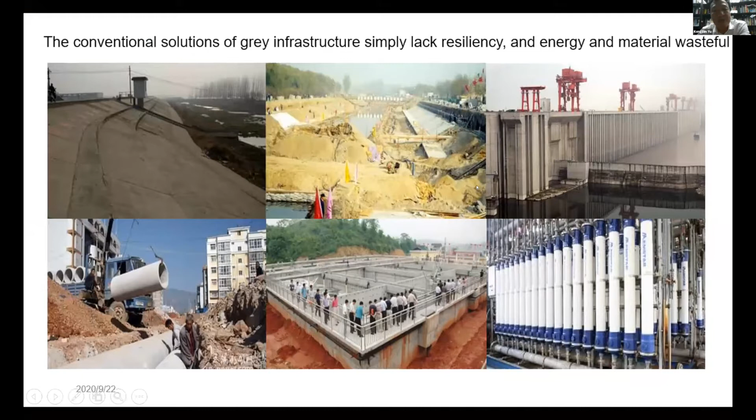Yeah. So as I said, we have to address this problem using the nature-based solution. Now, for these multiple urban issues, including water, flood, urban inundation, pollution, we usually use conventional solutions of gray infrastructure. But this gray infrastructure simply lacks resiliency, and is expensive in terms of energy, material, and certainly costs so much

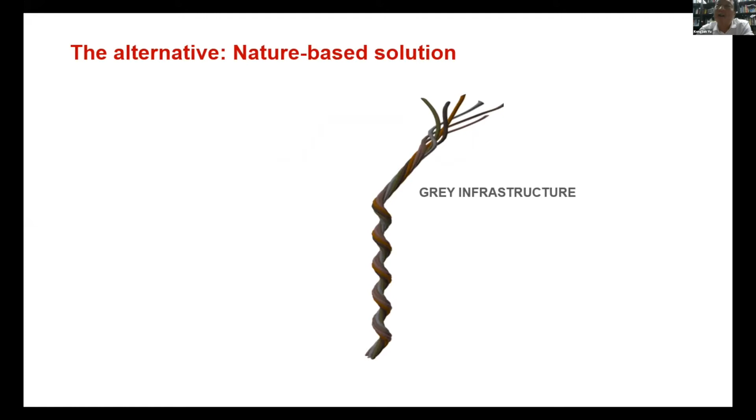concrete, you can see. When compared to the US, last century, the US is the most wasteful country in terms of use of concrete. But in China, in just 3 years, we consumed the same amount of concrete that the US consumed in 100 years. So you can imagine how much gray infrastructure we have built. And it simply messed up the whole natural system. Our rivers have been dammed in China.

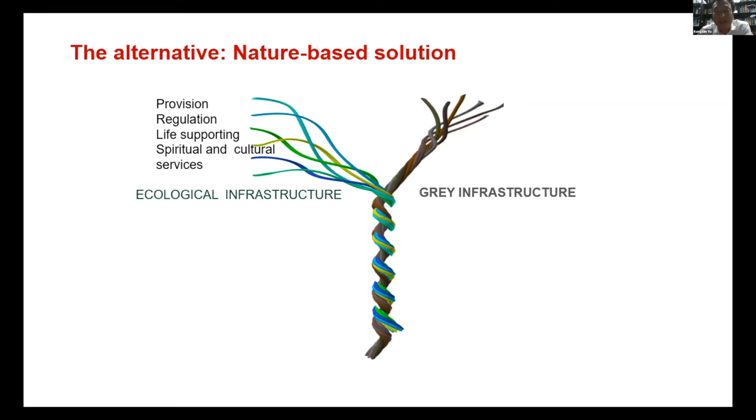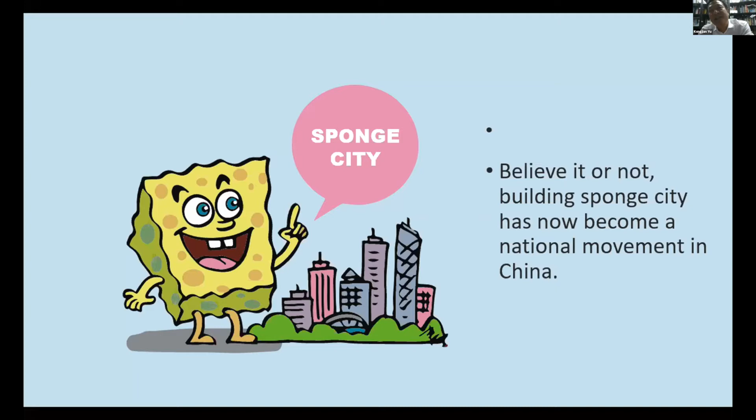So the alternative is a green infrastructure, a nature-based solution, a holistic solution that provides multiple services, the ecological services: provision, regulation, life supporting, and cultural services. So that's a holistic solution, the infrastructure. And such green infrastructure, we have a nickname now in China called the sponge city. In my definition, sponge city is simply an ecological infrastructure that retains water, cleans water, restores habitat, and is climate resilient. It's basically a nature-based solution.

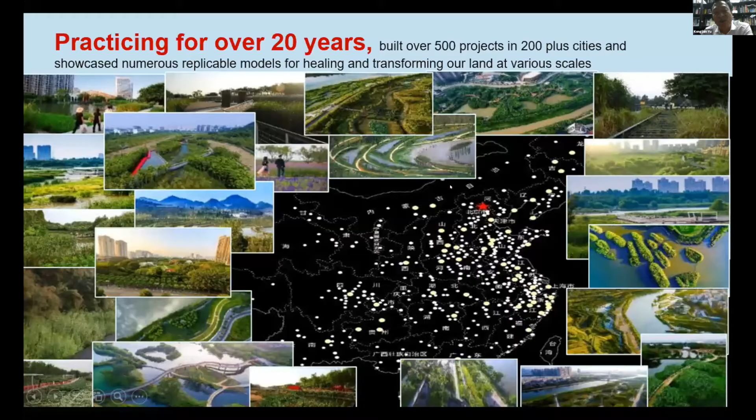So in the past 20 years, we have been practicing and testing this kind of solution based on nature, and we have built over 500 projects in more than 200 cities in China. Now today, I just want to give you 2 examples of how this green infrastructure can work. These 2 cities are in the south tip of China, Hainan Island, suffering the monsoon climate each year, flood season and dry season. So it's about how we can create climate resiliency by green solutions.

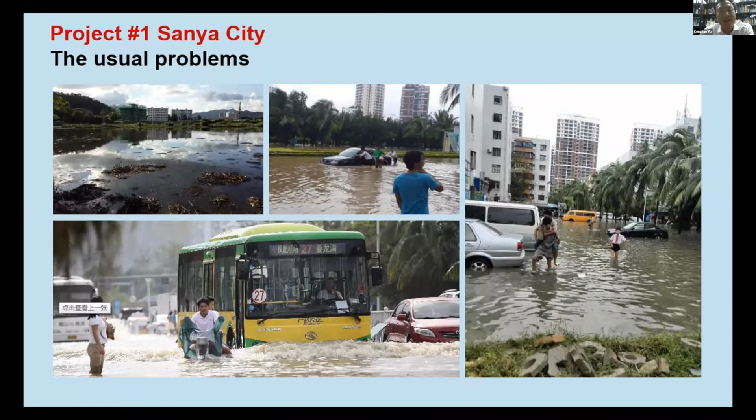So the usual problems you can see: urban inundation together with pollution, flood, and the lack of any public space accessible for use during the monsoon season. These are very usual problems. Over 400 cities in China are suffering the same problem, but particularly in the south part of China.

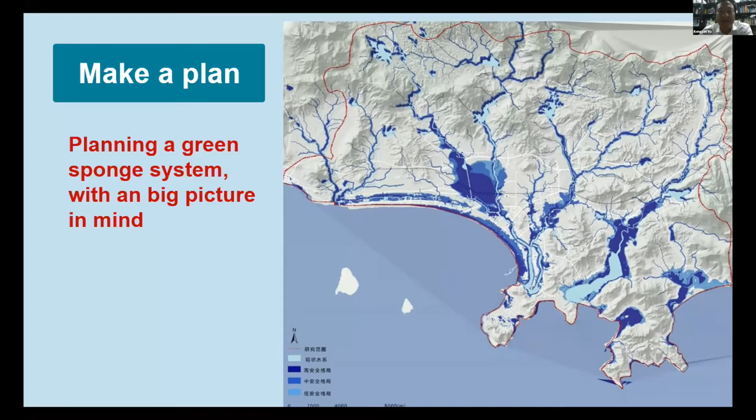So planning, as Phil just mentioned, think big, make a master plan for the whole urban region to create a green sponge system with a big picture. Use nature. Instead of the pipes and flood walls, we actually try to remove all these concrete flood walls and recover the natural system and test how this can work. And we find this critical strategic point in the middle of the city and test this sponge city solution.

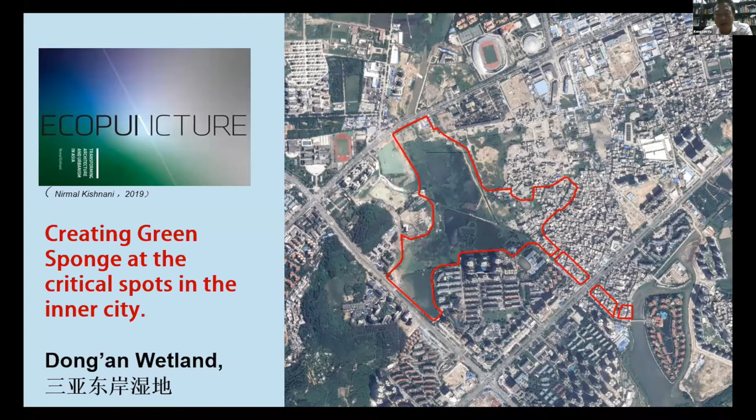This we call eco-puncture. I use my friend Nirmal's new book called Eco-Puncture. So eco-puncture, like acupuncture, we point to a critical spot in the city as in a human body. And this is a spot that connects rivers and waters, and suffers urban inundation. And the property value surrounding this site is really very low. It devalues the whole area because of the urban flood.

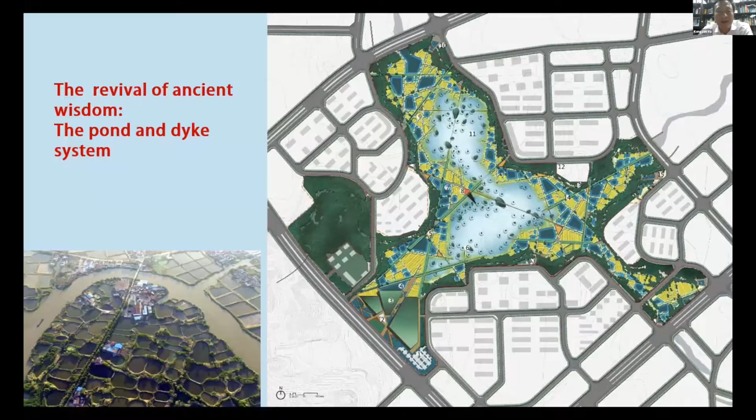And the technique is to revive the ancient wisdom. We simply use the pond and dike system in the Pearl River Delta area. In that marshy Pearl River Delta area, for hundreds and thousands of years, through testing, trial, and failure, we, the Chinese people, have learned how to work with, to live with, and to build a city within the marsh. And we borrow and are inspired by this kind of ancient wisdom, create islands, forests above the lake, and create habitat and public space by just simple cut and fill. Very simple, just one machine to create this sponge.

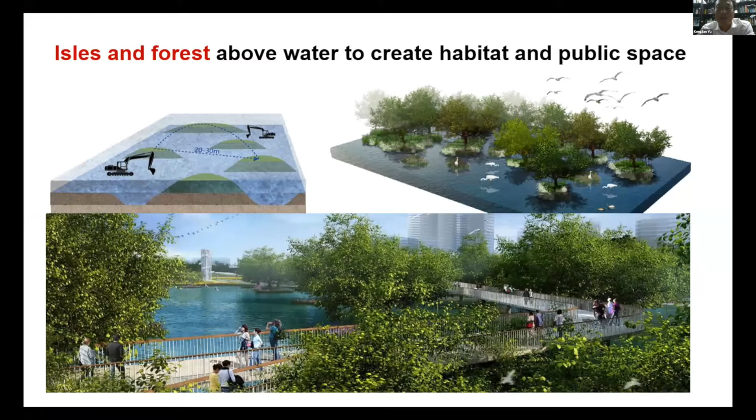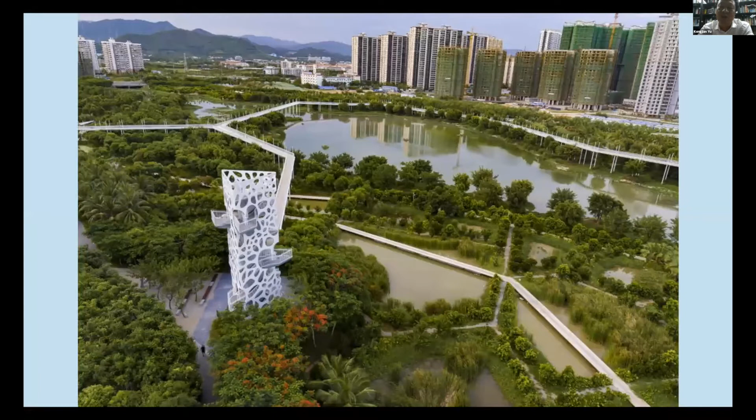And that's the rendering. It's a huge area. You can see right in the middle of the area, about 1 square kilometer in size. As the rendering shows, we use the pond dike system, islands. So these are very simple techniques. And in just 1 year, that's the process, how this has been transformed into a sponge, which has multiple functions. Now, the water is collected and filtered and habitat restored, and also integrated with public space, multiple purposes.

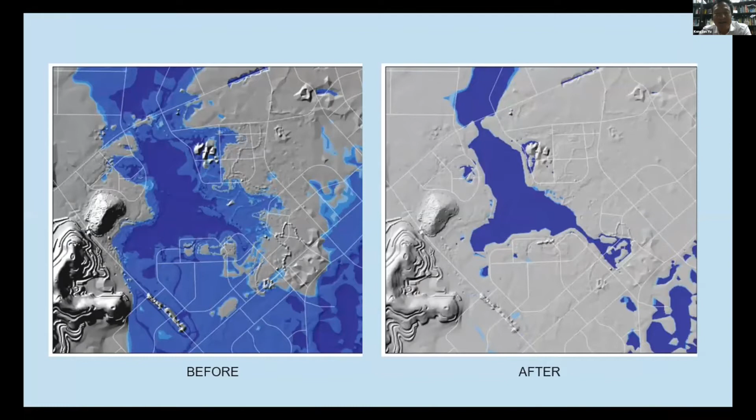And that's the result. You can see that is the before and after. The problem of urban inundation has been solved, and it certainly creates a beautiful park right in the middle of the city.

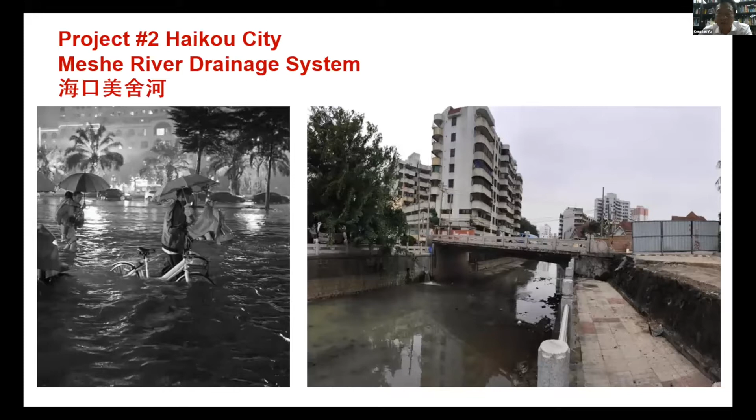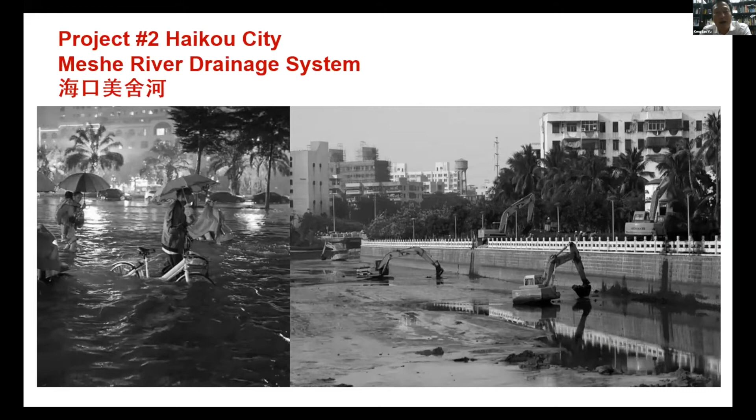Now, if you can do one project in the middle of the city, one park, we can do the whole drainage system. So this is another project, also in Hainan Island, but in Haikou city, a whole river, about 20 kilometers long. Again, you can see the problems here: flood, urban inundation, pollution, urban surface water runoff, polluted sewage leaking. And this is a conventional solution. You always try to dredge the river and line the bank with concrete, try to build the wall higher and higher. For 20 years, the problem was never solved.

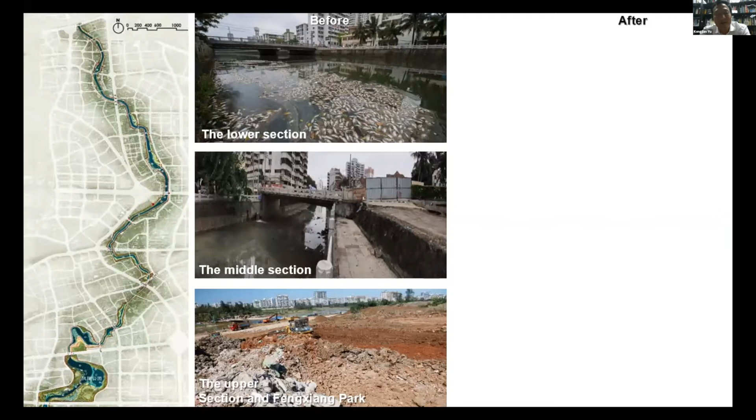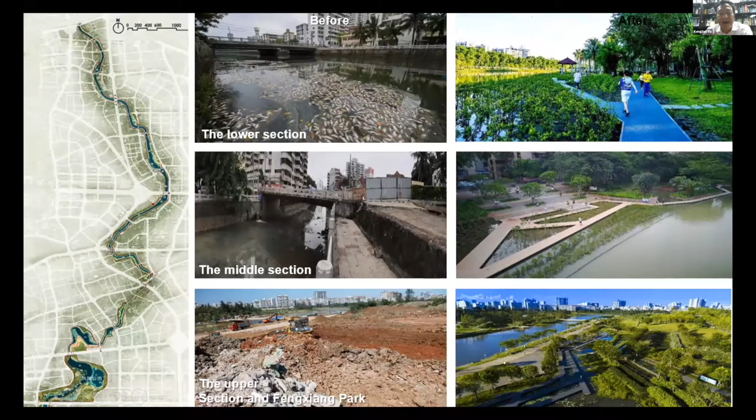So we take another way, as I said, the alternative, the green way, the nature-based solution. Create a river, recovering the river system, with three sections along the river: the lower sections, the middle sections that run through the dense city, and the upper sections. So we take different solutions, but certainly it's the same nature-based solution: terracing, islanding, and removing the concrete.

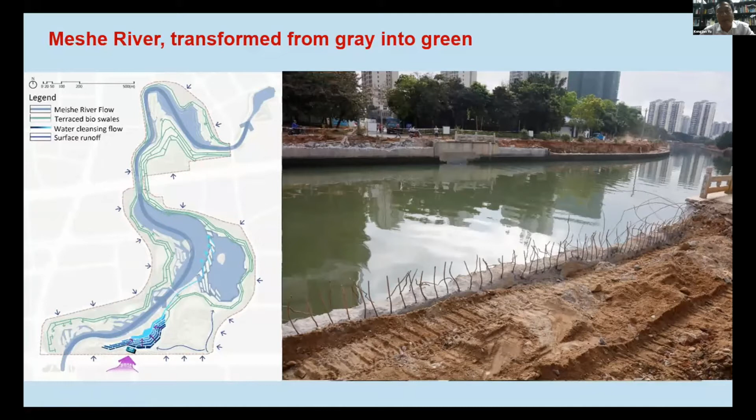That's the existing river like that. Break off, remove all the concrete. Now that sounds impossible in China, because we are still building all these flood walls in some other parts of the city. But in this project, you can see how we actually remove the concrete and divert the surface flow, the storm water, through the terraced riverbank, and use the riverbank as a filtering system. And that's the process of creating the terraces.

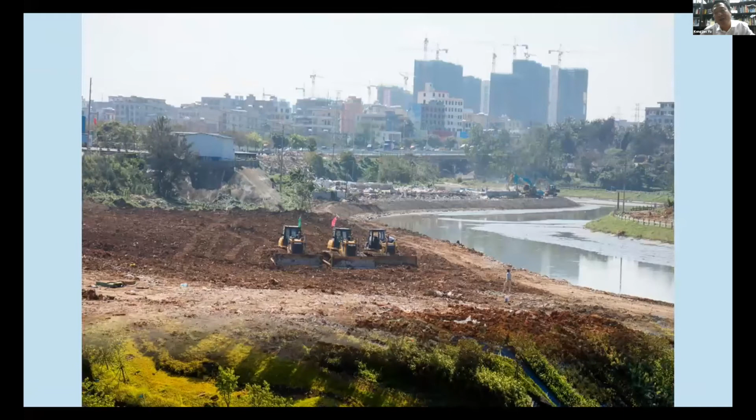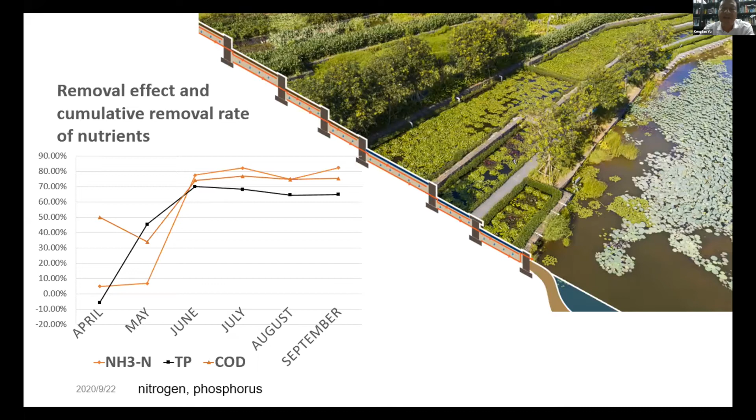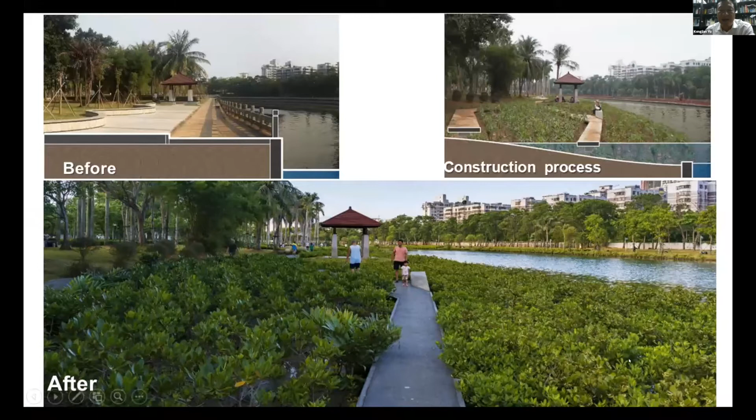And that's the process, a hard concrete construction process, and the mangrove comes back, and the recycled concrete is turned into islands, so that habitat can be created for birds, and the fish come back. That was 2015, and that's today. Fish, so much abundance, so many fish come back to the city. So these are just two examples. I'll just show you that it is such a quick, fast, efficient solution based on nature.

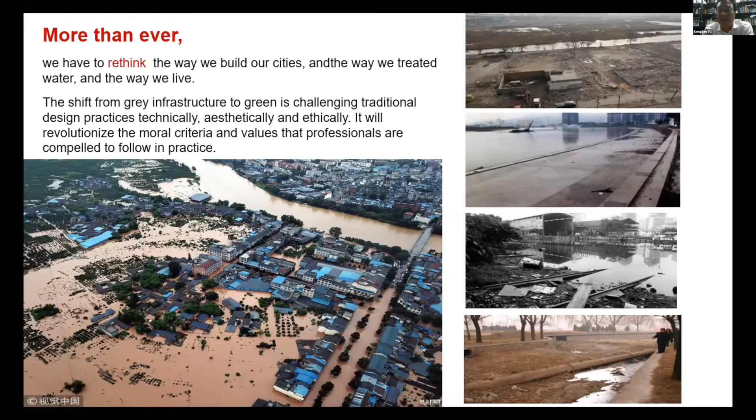So we have to think about the way we build our cities, the way we treat the water, and the way we live. The shift from gray infrastructure to green is challenging traditional design practices, technically, aesthetically, and ethically. It will revolutionize the moral criteria and values that the professionals are compelled to follow in practice. So climate change is an opportunity for us to transform our design profession. And it is across the scale, from the planet scale all the way to the backyard.

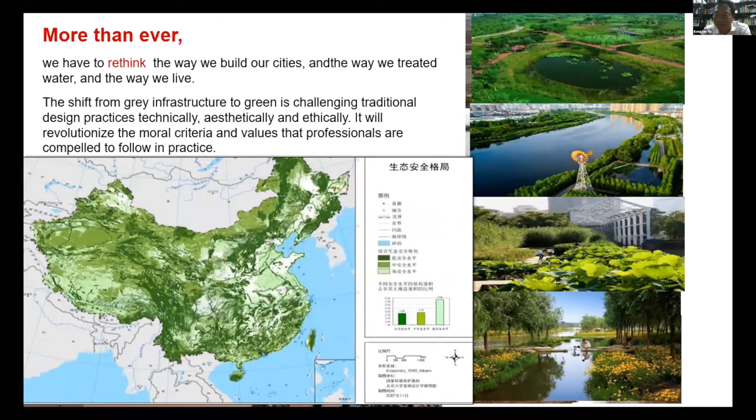Let me turn it over now to Ellen Lou. Ellen is a director of urban design and planning, the city design practice at Skidmore, Owings and Merrill, and is sitting in San Francisco. She's a world-renowned urban designer and a sought-after speaker. She gives many talks around the world, and she has consulted with over 200 mayors and government leaders in multiple cities, both in the United States and in Asia. She's a board member of SPUR, the San Francisco Planning and Urban Research Association, and the Global Institute for Transportation and Development Policy. I've worked with Ellen for over 30 years, I think, and it's a great honor to have Ellen join the panel. So Ellen, I'll turn it over to you.

Sure. Thank you, Phil. What an honor to be part of this panel. Let me just get to my screen.

And so I would like to use one case example to talk about the idea of planning at a larger scale. This particular case study is in the city of Chengdu. The city has built a new airport, and the question is how to plan the urban development that will ensue around the airport. The older city is right here, the airport is right here, and this will be the new city. It's a huge area that was to be planned, comprising the area of Manhattan, Barcelona, Washington D.C., San Francisco and more.

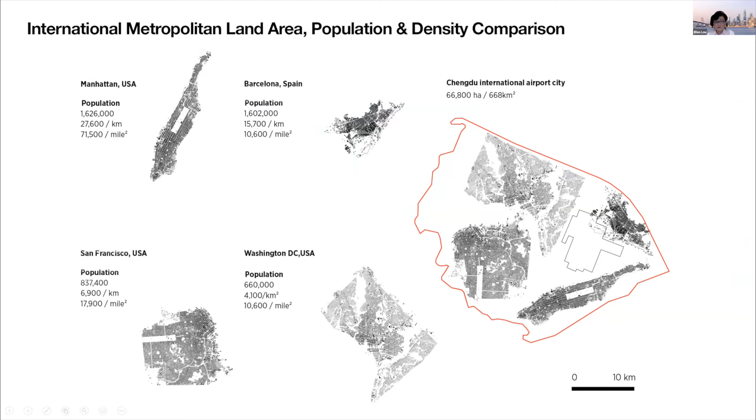But to do that kind of development, it takes an integrated team of architects, urban planners, landscape architects, ecology specialists, civil engineers, transportation planners, and you keep going. So we kind of rolled our sleeves up and worked together. So just a brief picture of Chengdu.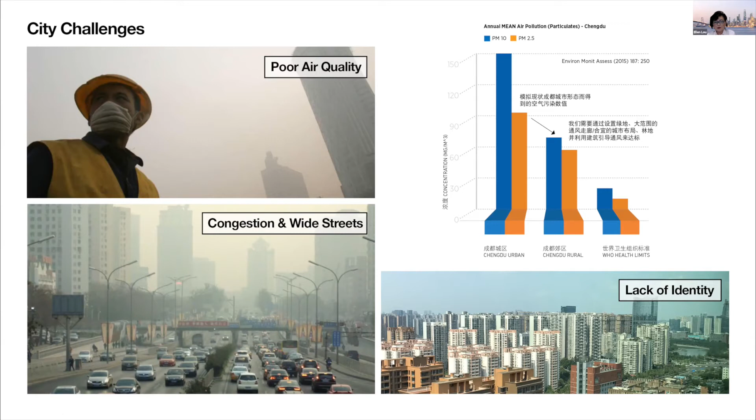So as we keep going, we really need to make sure that we don't bring the bads, the congestions, the dirty airs from urban area to this new area, but find a new way to clean the air and to improve it to be better. So it takes really, as I was saying, a much more integrated approach to think about ecology, resiliency, energy, carbon, the equity issue, mobility, health, and also the issue of heritage and identity.

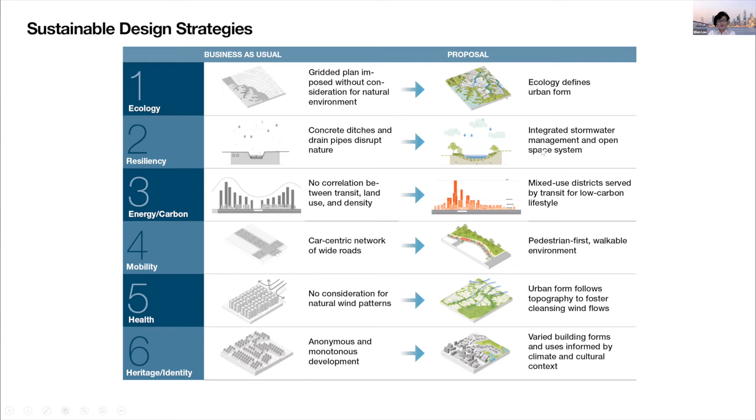So we look at this, from what is the business as usual model and what a new approach could be, including the sponge city idea that Kongjian just talked about. So how do we ditch the concrete pipes and drains and create integrated stormwater solutions? So just to highlight a few, this piece of land is very unique. It used to be in the bottom of the lake. So the landscape has a lot of,

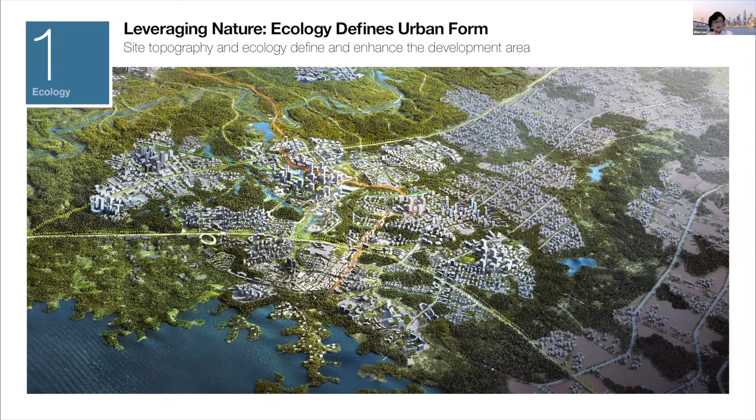thousands of hillocks. So how do we plan the growth of the city that really is sensitive to the topography and ecology of the area, preserving some natural corridors, and also climate change and windstorms and all the flooding issues, and integrate our city with the natural topography. So to do that, the collaborative team analyzed the forests that need to be kept in the area, which is very unique because of the hillock landform, understanding the local watershed.

And then there are 18 dams in the area. So in the unlikely case of dam failure, how do you protect the future urban inhabitants from these threats? And then the green corridors in the area. And of course, we talk about air quality. How do we maintain wind flow and then create a development zone that is well integrated and works with nature?

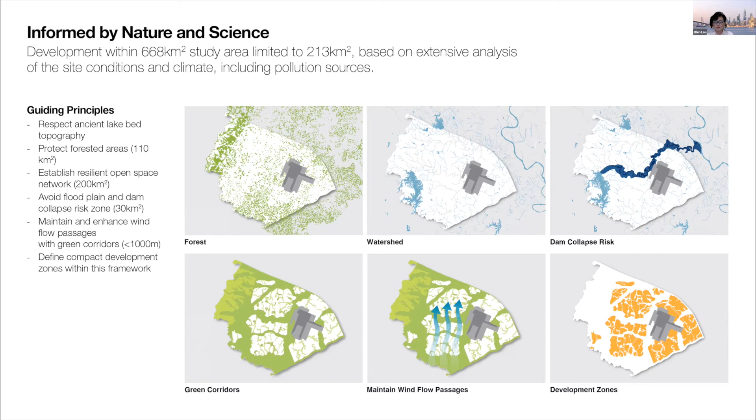So when we talk about working with nature, we really look into the natural topography of the land, and how that should preserve the natural drainage corridors, wind corridors, and then create a much more sensitively designed urban form. That's why this urban form is so special. It doesn't look like any. It's because the land here is very different.

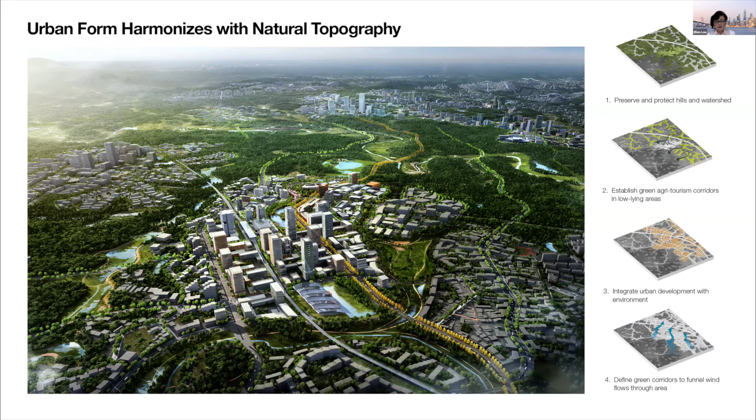And of course, resiliency issue, we talk about the river corridors. How do we protect the ecology of the area, and also protect the low-lying area from urbanization that will conflict with ecology, and also be susceptible to future flood.

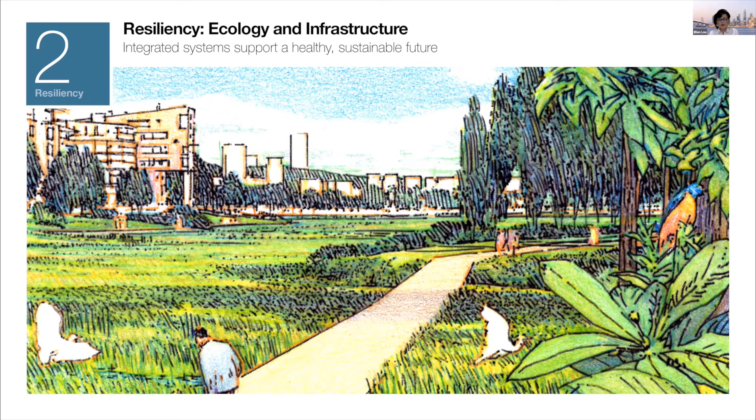And then something that is really special, that we work together with our ecological specialists, our landscape architect, and our infrastructure engineers, is we don't do one thing at a time. We really want to do many things at a time. So the ecological system is actually integrated with the infrastructure system. So for instance,

we don't just create little dams and ditches to deal with water and flooding issues, but we will have submerged microturbines that in turn will generate local energy, and at the same time protect and work with water management. So how do we continue to leverage this approach, that everything we do, every investment we do, we leverage for multiple benefits at different levels.

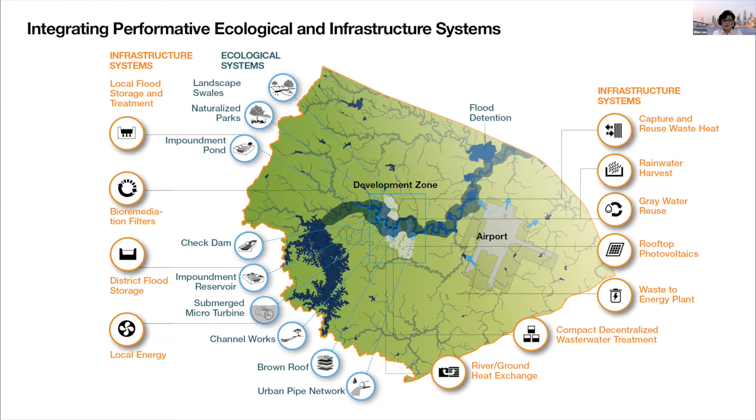We also talk about the idea not only on the engineering side; the other side is how do we create landscape that really is open, is lush, that filters air, and manages the stormwater, very much like what Kongjian was talking about. And so that will invite people outdoors and have a healthier lifestyle, closer to nature.

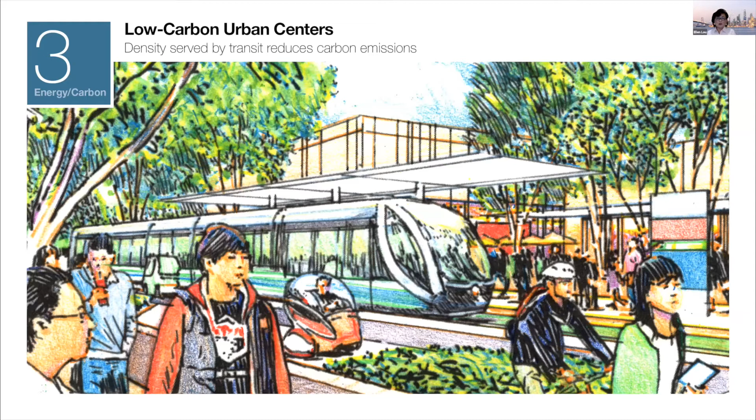To talk about low or positive carbon development, we have to talk about transportation. And it is not just transportation and transit, but really how do you integrate development with the transportation system, so they influence each other from the very beginning. And besides the integration, it's also very important to set an ambitious target to reduce the use of single occupancy automobiles, and then really target a very high percentage of our transportation investment in non-polluting, green infrastructure like transit and non-motorized transportation modes.

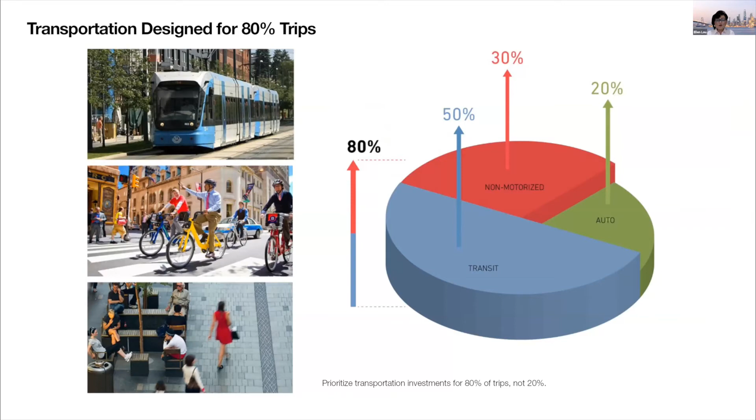And of course, we cannot do this without thinking about the local identity, the traditional landscape, the hillock forms, and also the local culture and how the villages used to integrate with the landscape and the architectural character of this region. So here in this region, the climate is very mild, it's very comfortable. It doesn't have a lot of rain. It also doesn't have very long sunlight. So in this area, traditional living has a lot of indoor-outdoor environment.

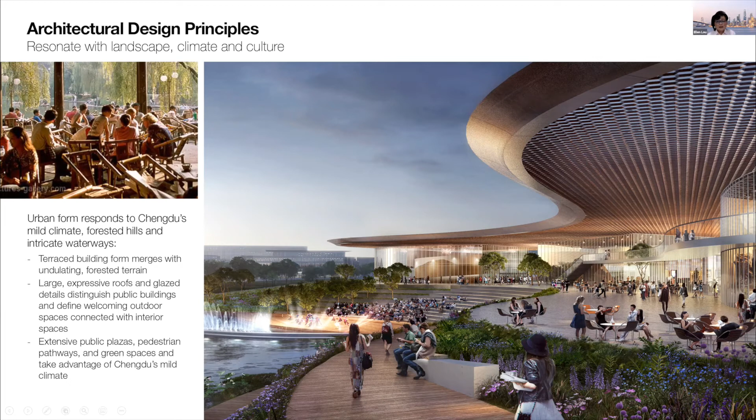And so even in the new environment, we set up guidelines to encourage people to design in a way that is very responsive to the local conditions, not only in terms of topography and the water management system, but the architectural expression of integrating indoor and outdoor living. There are also a lot of traditional design details and vocabulary, such as the screen system, and very short eaves because it doesn't really rain and it doesn't have very strong sunlight, to bring this kind of responsive architecture into the modern architecture language.

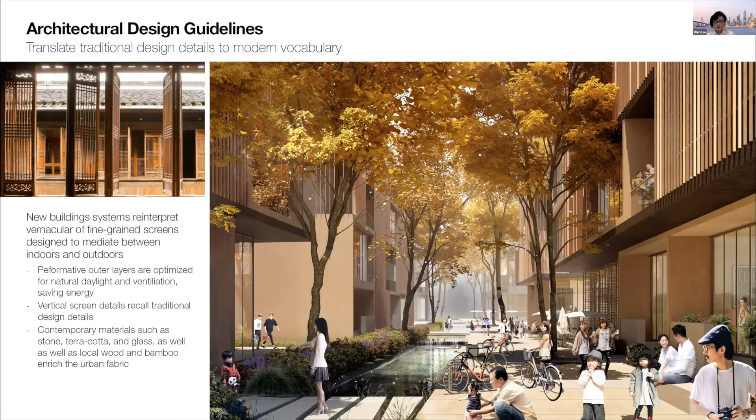So when we do all this together, we would like to continue to promote the idea that is transit-based. This is a transit center that's planned, but also very importantly, environmentally based. So this is my little short presentation, and I will hand it back to Phil.

Thank you, Ellen. The last presenter is an emerging young talent in SOM's office in Shanghai, Yinying Zhou. Yinying has been developing a very strong focus on responding to culture in urban design in Chinese cities, and also weaving into that response a larger ecological mission. She has been working with the city of Jinan for many years now, especially one great project I hope she will talk about, the Yellow River National Wetland Park, which is becoming a very interesting project for her. So Yinying, I will turn it over to you. Okay, thank you, Phil.

Okay, it's an honor to be in this panel and discuss how design responds to climate change. Before I start to share the Yellow River project, I just want to quickly go through what happened on the planet. Actually, the planet has been facing dramatic changes since 1960. The global population has more than doubled. Over 70% of the world's growing population will live in urban areas by 2050. So in the past 40 years, the global temperature has risen sharply by about 0.7 degrees.

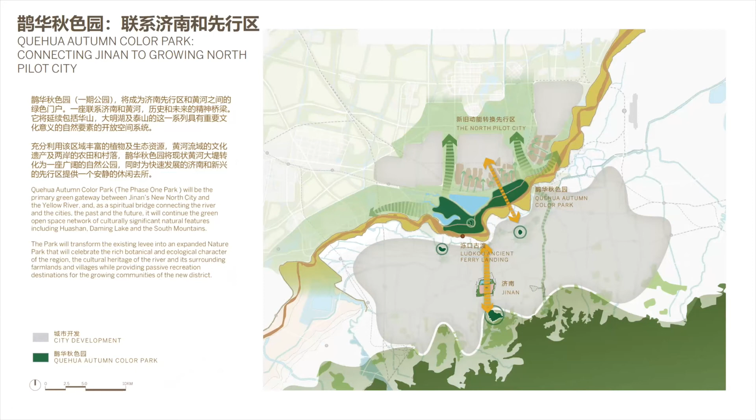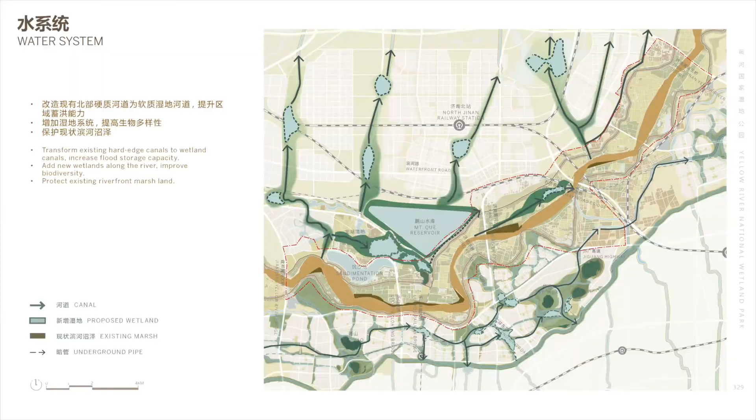So we also developed a vibrant ecological flood control system. We'll use this system to capture, clean, and slowly release the stormwater, and also improve the biodiversity and restore habitats. So instead of imposing large-scale interventions, we are using a so-called surgical incision into the existing land use. This kind of restoration system is applied to our 3 square kilometer phase 1 park design.

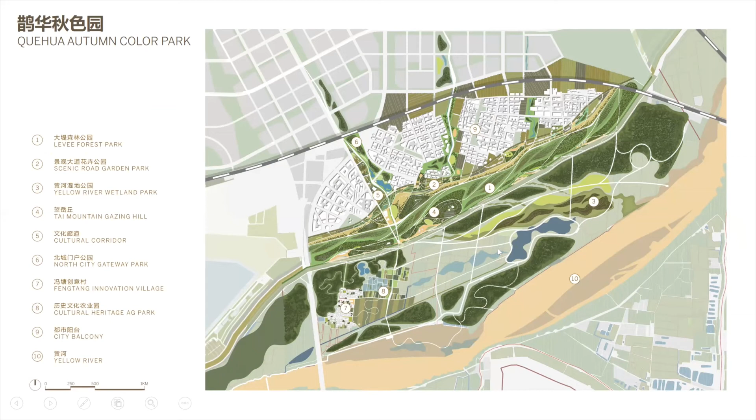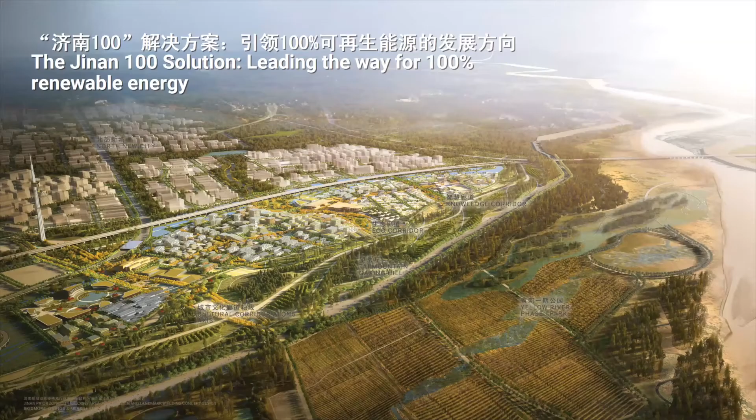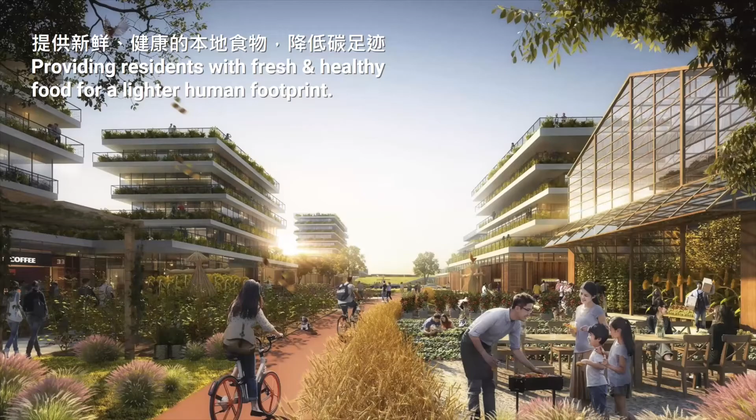We also did the master plan for the city balcony, which is the phase 1 of the North City, and will become a starting point for this connection between the river and the city. So as this district is aiming to achieve 100% self-sufficiency on water, food, and energy, the project is an attempt to focus on health. By blending agriculture with community, forming a complete living natural framework and promoting a healthy lifestyle, we believe the Yellow River and the North City project will achieve the harmonious existence between city and nature. So that is my presentation.

Yeah, I will hand over to Phil. Thank you. All right, thank you, Yinying. Let's jump into some questions because I know we don't have a lot of time.

Kongjian, I wanted to come back to you on this idea of the ecological infrastructure that you mentioned. This green infrastructure, nature-based infrastructure, has made really great advances in Chinese cities, I think much more so than just about anywhere in the United States or in the EU. How can designers advance this thinking faster? How can designers influence the policymakers so that designers are bringing cities and policymakers along in a much faster way? What's your experience with the people that are scripting policy?

Yeah, I think particularly in the Chinese system, you really have to have the political power at your side to push forward this thinking. That's why the first thing when I came back to China was to write a book, to talk to mayors and write letters to mayors, and I even sent a letter to the president, the former president, and the prime ministers, and certainly got their notice. And so that's why we have a national movement of sponge city and ecological security pattern. Now this has all become a national agenda, even at the CPC's Congress.